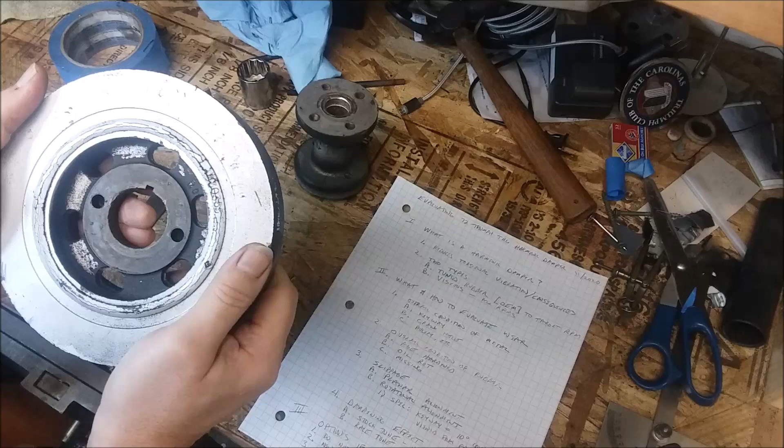Hi, today we're going to evaluate a 1972 Triumph TR6 harmonic damper.

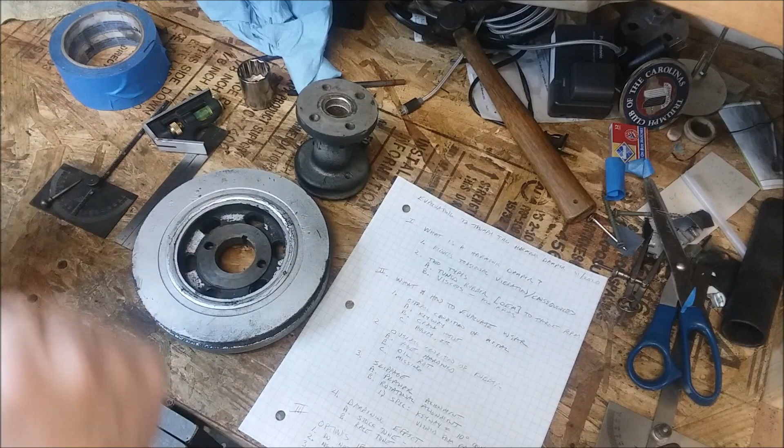Do I reuse it? And if it's not in spec, what are my options? Can I get a new one? Do I rebuild it? Why should I do each? Some of them are really expensive, some are fairly cheap. Which one do I need to get? So on. We'll also look at the tools that I use in doing this.

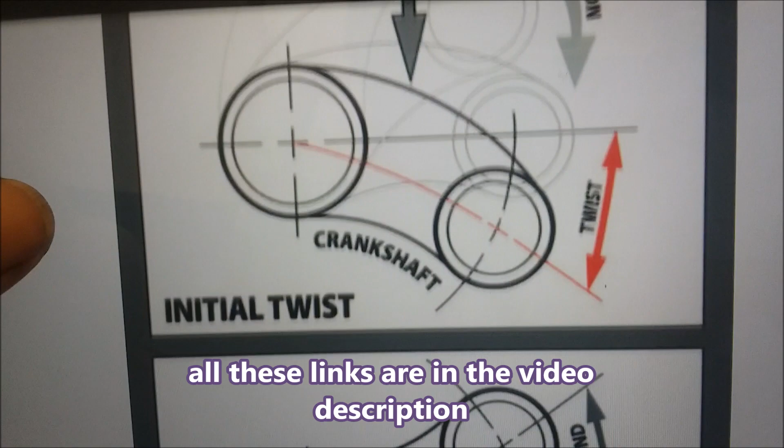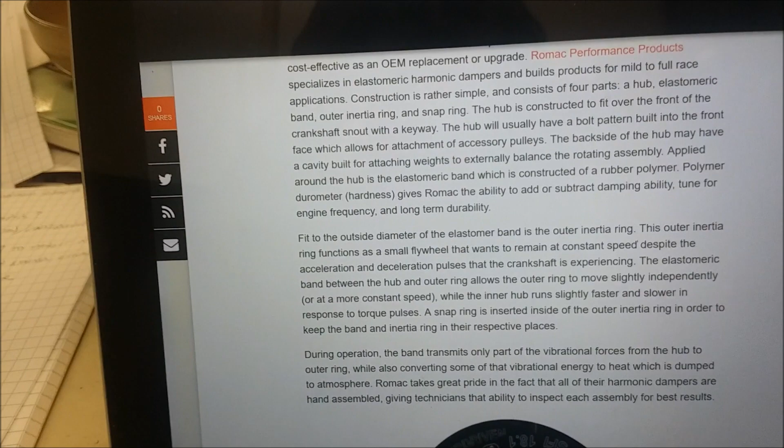This website helped me a lot in understanding what a harmonic dampener does. It's Enginelabs.com, and it talks about how as the pistons fire, the crankshaft actually twists, and explains how the forces of the twist, an initial twist when the piston fires, and then it rebounds. The purpose of the harmonic dampener is to take up some of the energy of that twist and rebound. It talks about how there's two kinds of harmonic dampeners. There's one that has an elastomeric band in it, which is what ours is, and there's another that's fluid. Anyway, it talks about the different parts.

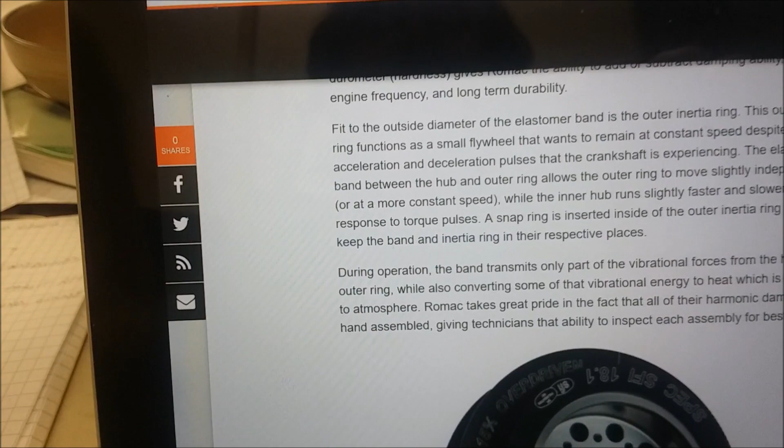There's an outer inertia ring that acts as a small flywheel that wants to remain at a constant speed despite the acceleration and deceleration. There's an elastomeric band, which is the rubber in between them, and the inner hub that runs slightly faster and slower in response to these torque pulses. So the band transmits part of that vibrational energy, the forces from the hub to the outer ring, and converts some of it to heat.

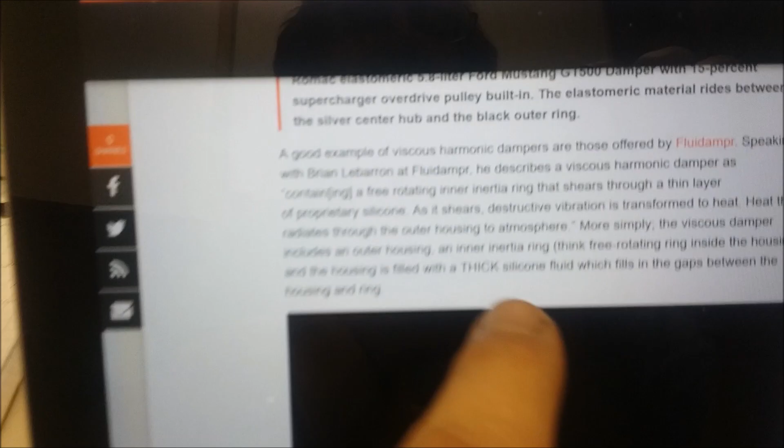Now there's another kind, a viscous harmonic dampener that has a thick silicone fluid inside of it. The elastomeric kind, the kind we have, is tuned to a particular speed. The advantage of the fluid kind is that it works throughout all the RPMs. The elastomeric, maybe they tune it to where we redline, maybe 5,500 RPM, something like that. The fluid one does the whole thing.

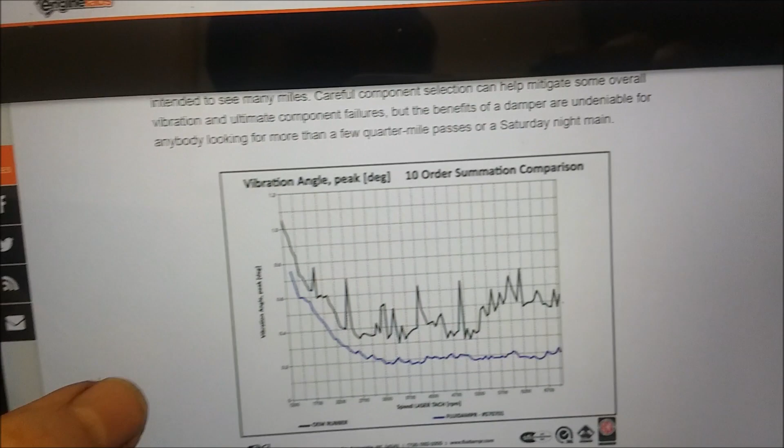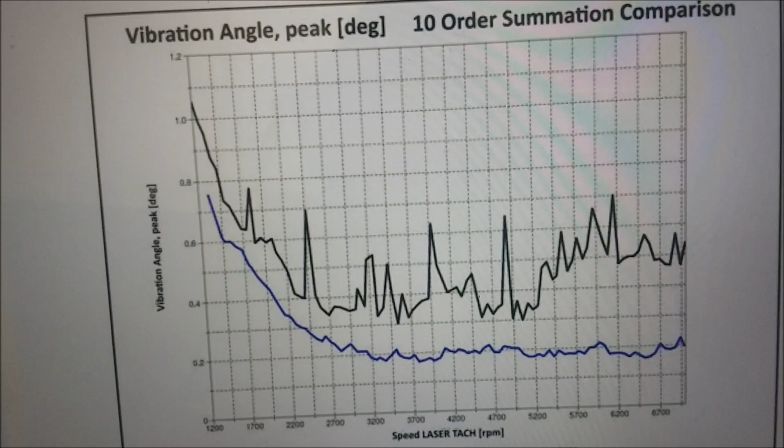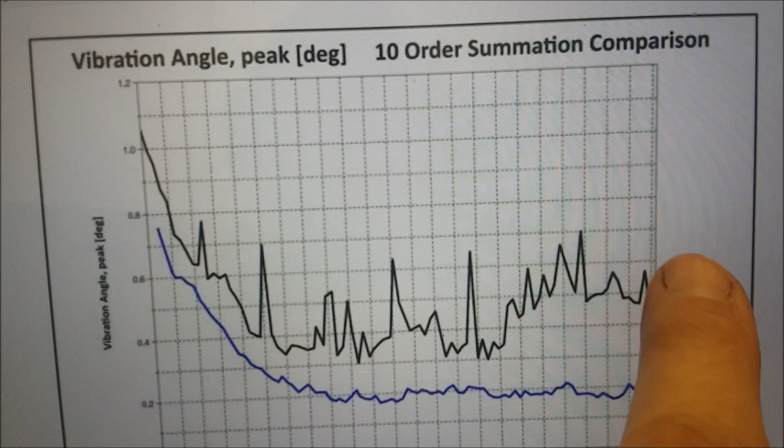So here is a chart. The chart goes from 1,200 RPM to about 7,000 RPM, and it shows our style of dampener has all these spikes in it. The liquid, the viscous one, is nice and damped across the RPM range. And you can see ours, here we go, about 5,500, it starts to really shake. This would explain why, if our chart looks like this, 6,000 RPM is a bad idea in our cars.

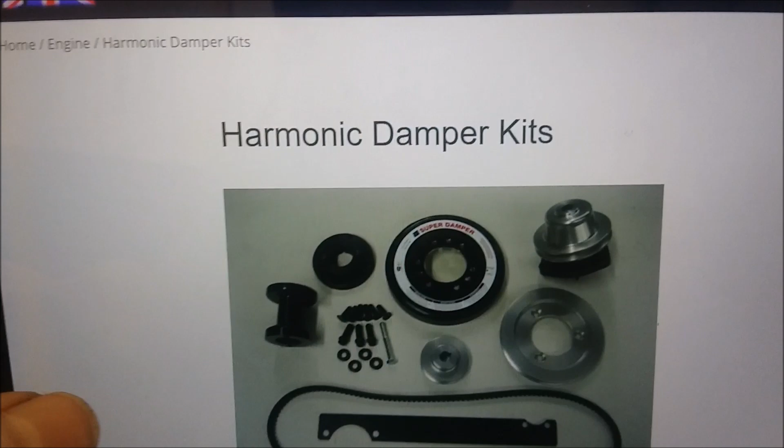It's interesting that if you go over and look at Good Parts, they talk about how you can buy one of these fluid harmonic dampener kits rather than the elastomeric one. And he talks about how it extends the power range by 600 to 800 RPM more.

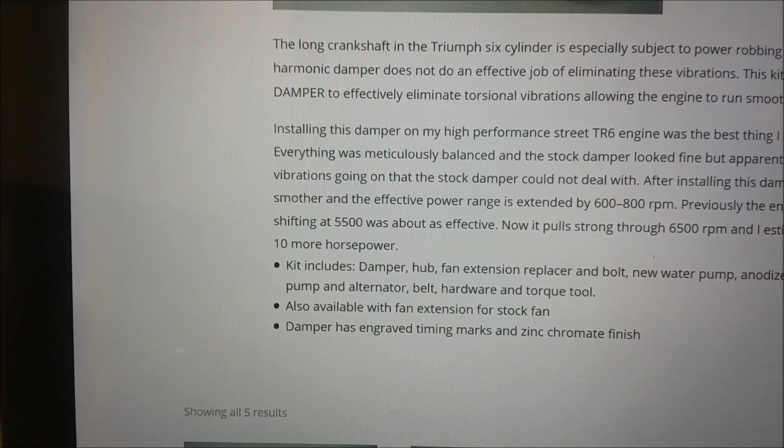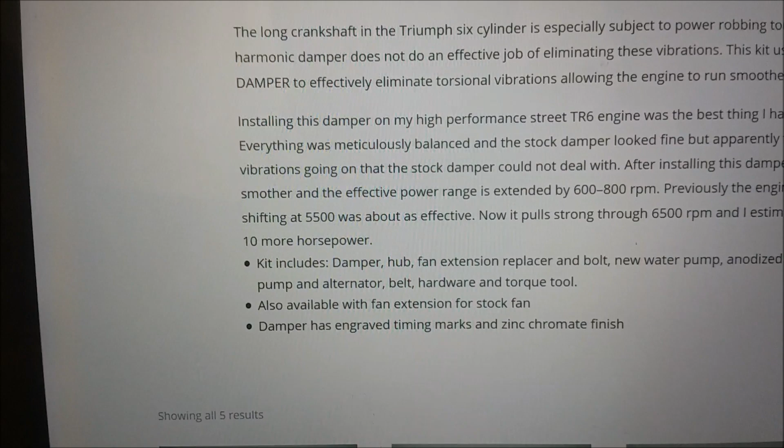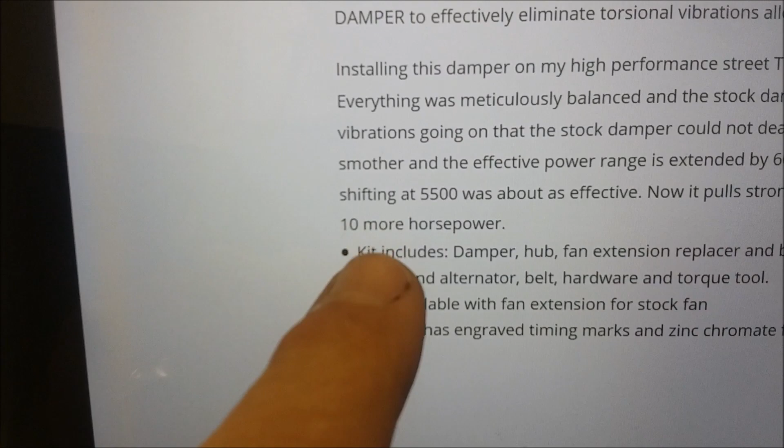Previously, his engine could only run to 6,000 RPM, but shifting at 5,500 RPM was about as effective. Now it pulls strong through 6,500, so it gives him an extra 600 to 800 RPM, and he says he gets at least 10 more horsepower out of the thing. So I thought that was pretty interesting.

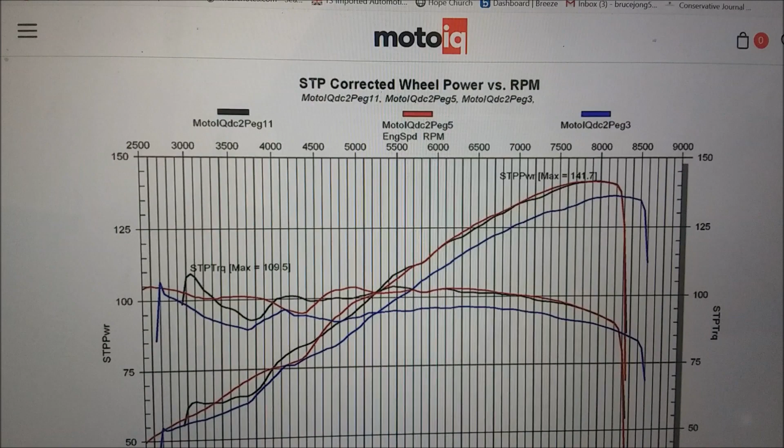So I question anytime anybody tells me I can spend $100 per horsepower to buy their whiz-bang product, whether that's true. I found this motoiq.com site where they actually tested one of these fluid-based viscous harmonic dampers versus one of the other ones, and you can see they were getting about 5 to 10 horsepower more across the entire band.

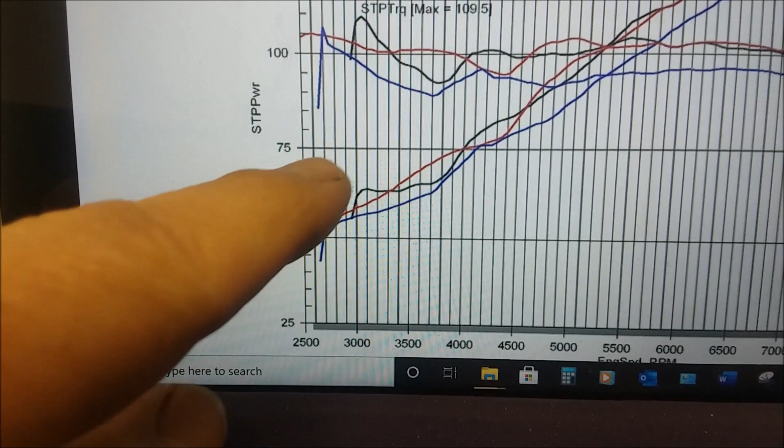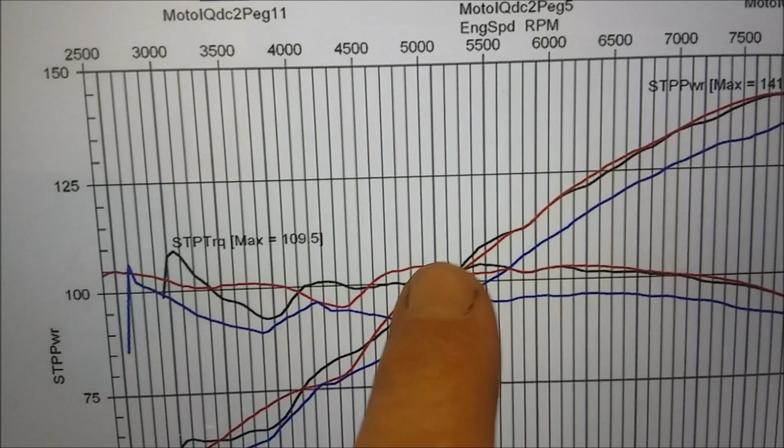The blue, the bottom line, is the base line. This is the base line here, and then these are the viscous ones, and you can see there's about a 5 to 10 horsepower difference.

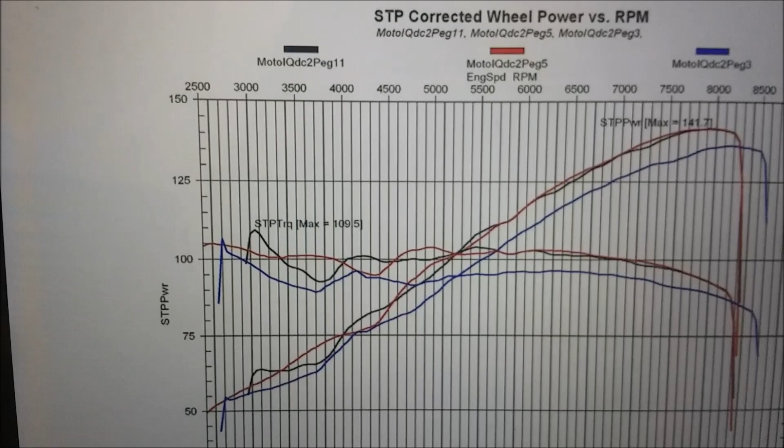Now that's this engine. Who knows with our engines? Good Parts claims they get 5. What would he claim? He said he gets 10 more horsepower, and it pulls strong.

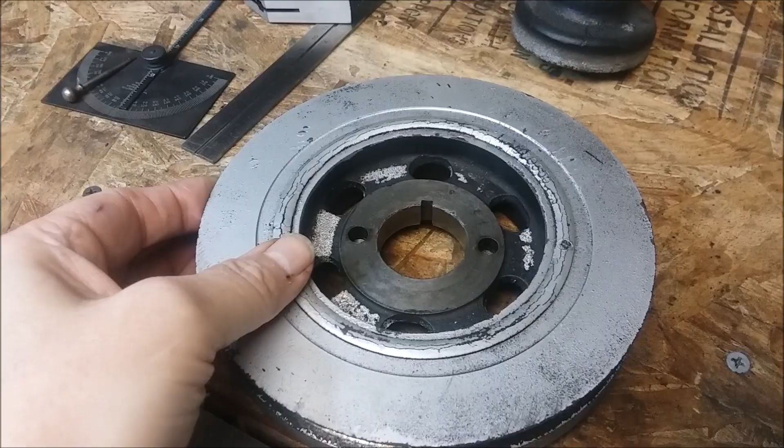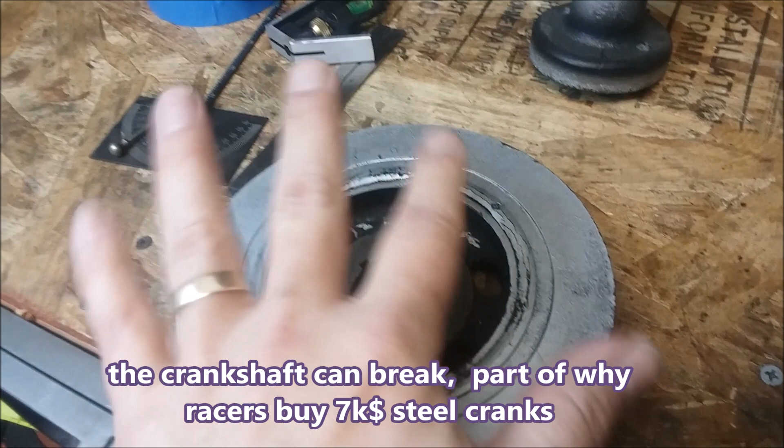So maybe so. So what are the symptoms? How do you tell if this thing has gone bad, if it's no longer dampening? Well, it can cause a vibration in the car, like a drive shaft that's out of balance. It can cause noises, and it can grenade, actually fly apart and grenade the inside of your engine compartment. It also can cause your engine to grenade if it no longer dampens those torsional vibrations, especially at higher RPM.

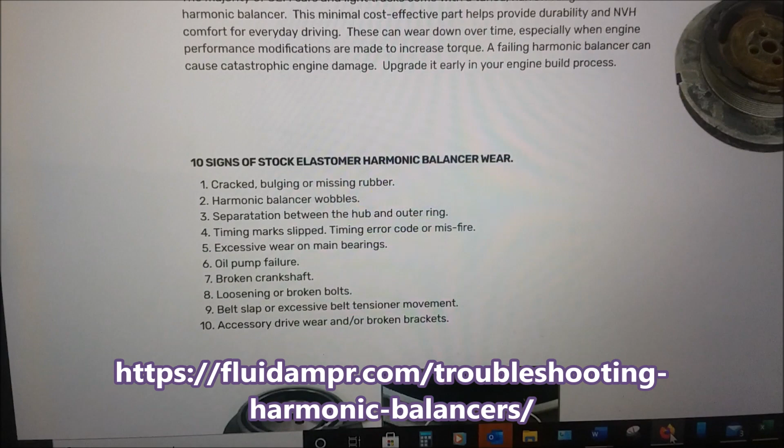I found a great website on troubleshooting harmonic balancers, especially the elastomeric ones: fluidampr.com. It gives a list of 10 things you can look for. I covered several of them. You should cover the rest on your own.

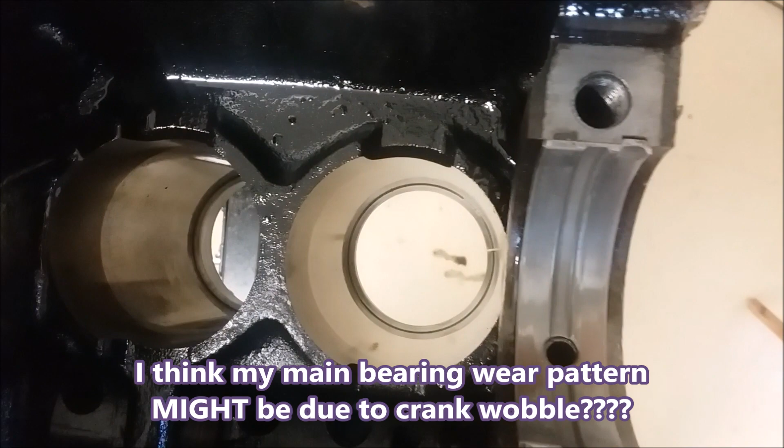A visual inspection of the main bearings shows some wear right here. This one has some staining in the same place, but I'm not sure that's wear. This one seems okay. Number 4 has the most wear, you can see it right on the outside edge here.

So let's get down to evaluating this one. First off, we're going to look at the overall condition of the metal - the keyway, the crank hole, and the pulley, and so on.

Looking at our keyway, this is really important because a lot of these fail at the keyway. We see on this one there is a little damage at the rear edge of this keyway - you can see it's opened up a little bit. I don't know if that's normal or not, it doesn't look like it to me. Maybe somebody tried to force it on, but it looks like most of the keyway is okay.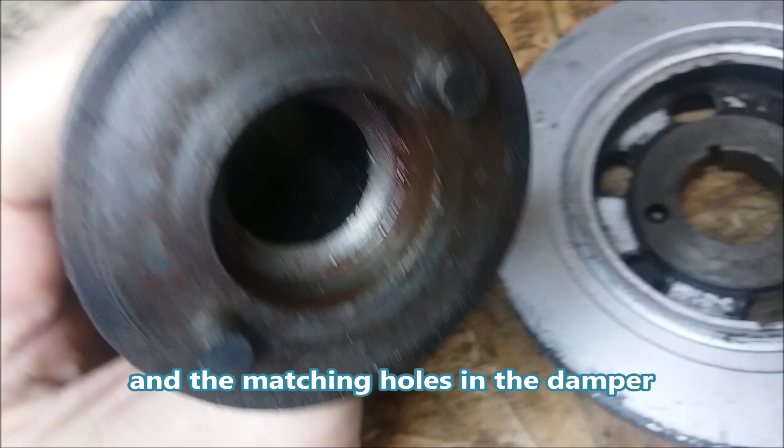The bore hole looks okay. I did a careful examination of it, and I also know that it fits on the crank well. The pulley itself, the metal of the pulley, looks fine - there's no broken, chunked pieces out of it. And lastly, the pins, which are located on the front hub piece on mine, look like they're in good shape. I don't see any evidence of movement or unnatural activity happening here.

So to throw one more piece of controversy in here, there is discussion as to whether or not this piece does damping action. You can buy a fan eliminator kit that will get rid of this piece. Well, that's quite a bit of weight on there, and some people have argued that this weight is necessary to provide additional damping force to the crankshaft beyond just the damper. So if you take this weight off, you're actually allowing your crankshaft to flex more. I don't have an answer to that - that's something you'll have to decide for yourself.

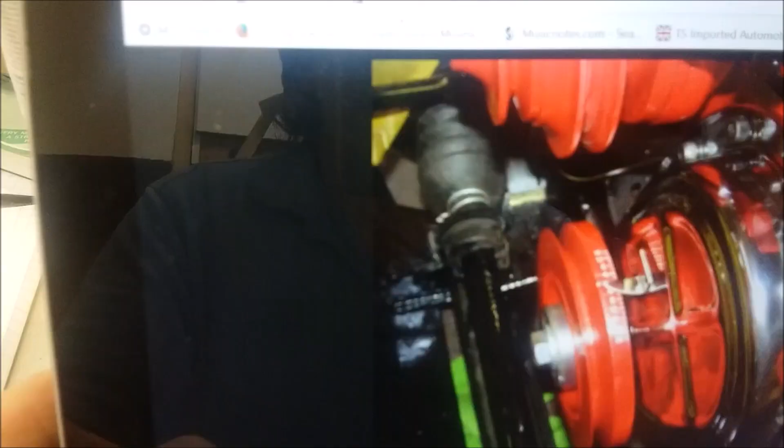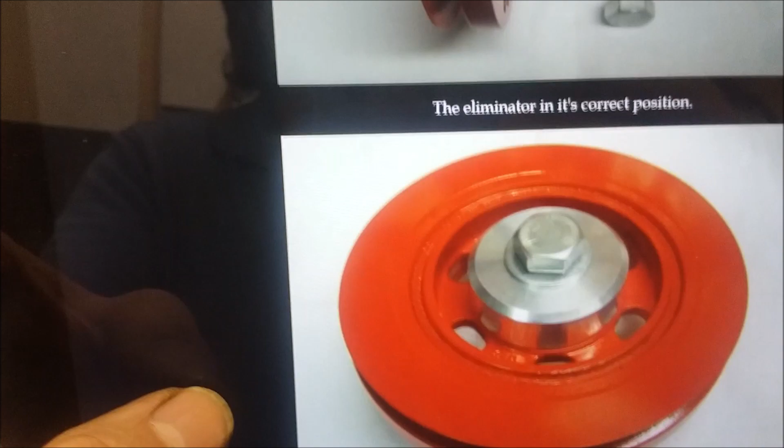So here's an example of that on the 74tr6.com site. He does a section on replacing his damper, and he's put the fan eliminator kit in place on his and seems to be happy with it.

So overall, the metal looks fine. I'm going to give that keyway a pass - I'm going to say good enough.

So now we're going to look at the overall condition of the rubber. Now they painted over this rubber, and the front looks okay - I think that's just cracked paint. So the front of it looks okay. But look at the rear, and it's kind of swollen up and cracked. So there's a problem there.

The first thing I read about is that you look for aged or hardened rubber - is it breaking off, is it chipping off? Well, no, this feels still rubbery, it's not hard. Let's take a look at this side too - this side feels rubbery too. It sort of feels like maybe inner tube tire, or like a tire - it feels like putting my thumbnail into a tire. So as far as that goes, it's okay.

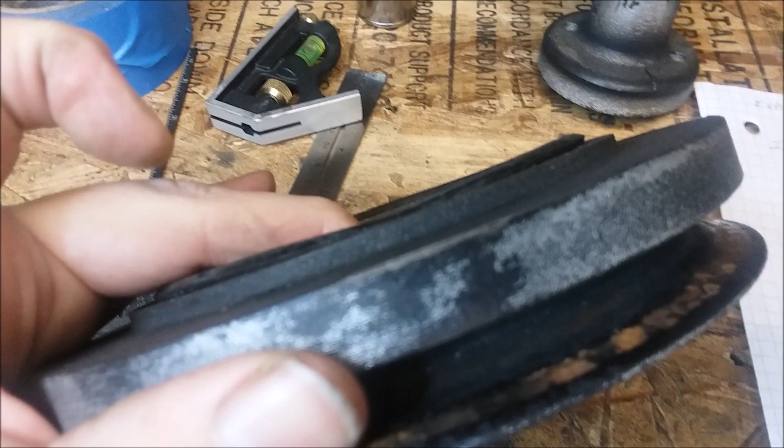So it looks like we're all right for age hardening, at least what we can get to. Another thing they said to look for was oil rot, and oil rot will cause bulging and cracking. Well, that sure looks like bulging to me. That looks like it probably, I would guess, wasn't like that from the factory. And this cracking and bulging, I think that's from oil - this car had a really bad front seal, it leaked oil like crazy. So I think this is oil rot here.

How far in does that go? I don't know - I can tear it off if I really try, but it's really hard to tear off. The other thing it says to look for is if there are big chunks missing. So overall condition of the rubber, I'm going to say questionable - that looks like oil rot there.

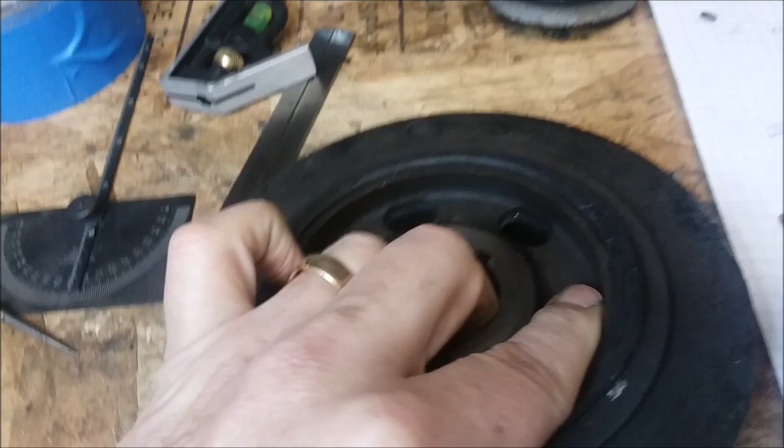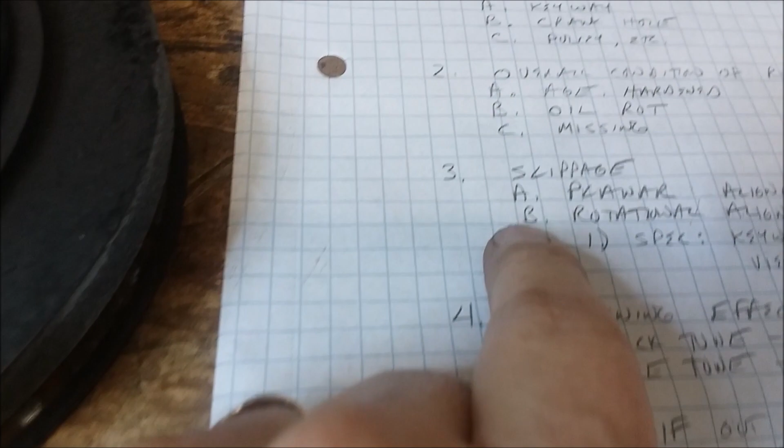I don't know how far down it goes. So the next thing that we can check is the alignment. We're going to look for slippage, specifically planar alignment slippage and rotational alignment slippage.

Now, what do I mean by planar? That's a word I made up. But remember, we have the outer inertia ring and the inner ring. These rings apparently can slip side to side, where the outer ring could be offset to this side or that side. That planar alignment looks pretty darn good to me.

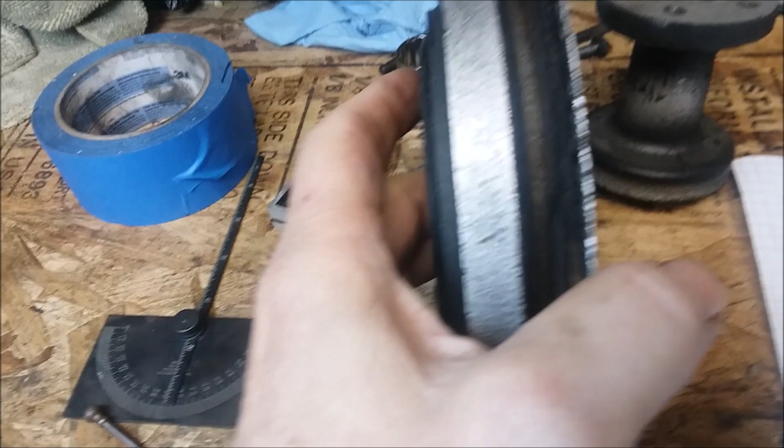Now the question is rotational alignment. You may have heard about this, that there's some question as to whether or not the inner ring turns with respect to the outer ring. If this gets worn or heats up too much, the inertia can actually turn the outer ring with respect to the inner ring.

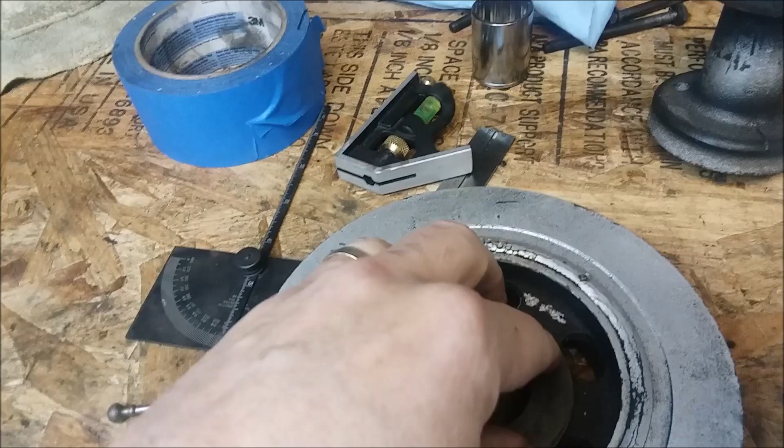Well, what's the problem with that? The problem is this keyway and line is on the inner ring, and your timing marks are on the outer ring. A lot of people have reported that their timing marks are out of alignment, not in the correct position. I saw one for a Spitfire where it was way over here somewhere.

So what is it supposed to be, and how do you measure it? Just taking a quick glance at mine, it looks like the top dead center mark is a little bit clockwise, a little bit this way of where that key is. What's it supposed to be?

I looked in the manual. It's not in the manual. So how do I know if that thing slipped? I've seen a lot of people resort to just timing by vacuum gauges or by ear because they have no confidence in this and they don't know. Well, I think I figured it out. So let's take a look and see what that specification is, the relationship between the keyway and the timing mark, and how to measure it.

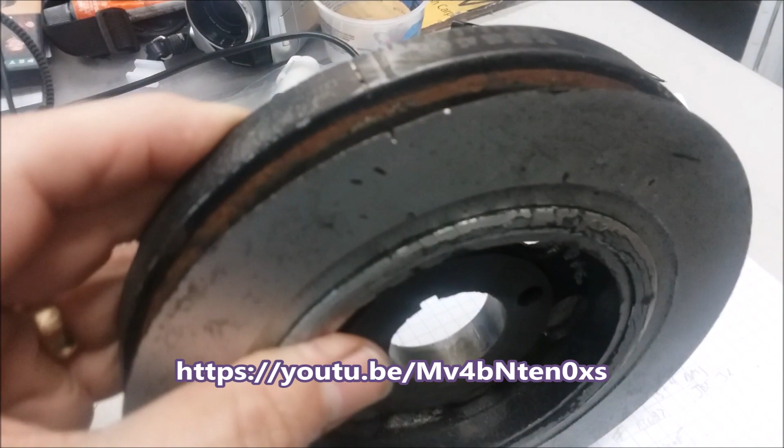So I purchased a new damper that I sent back because the marks here were wrong. I'll put a link to the video there. But at the time I had it, I did compare the crank keyway to the top dead center mark and found that this one was identical with the new one. So I have a pretty good reason to believe that this one has not slipped, and I can use this as a reference.

I did, however, find on the Six-Pack forum somebody who had answered this question under a thread called crank damper key, and they mentioned that they had looked at it and found that it was 10 degrees after top dead center. If your mark shows it to be 10 degrees after top dead center, it was put together by the factory. So we'll take a look at how to measure that.

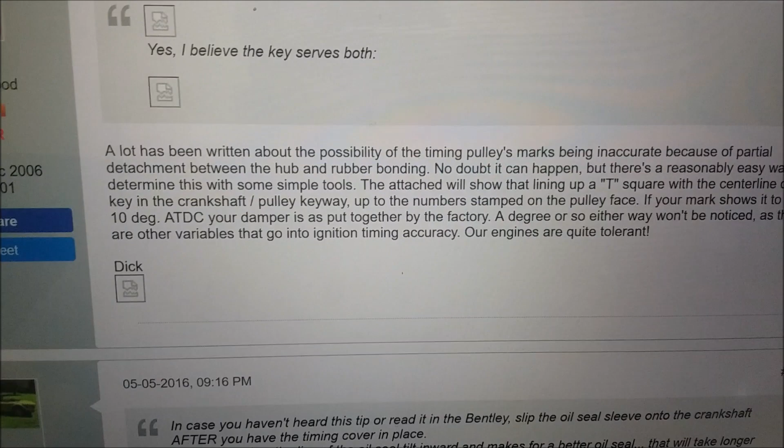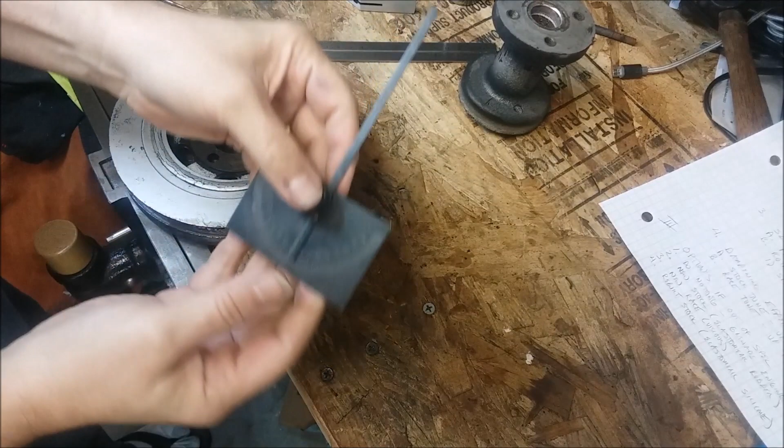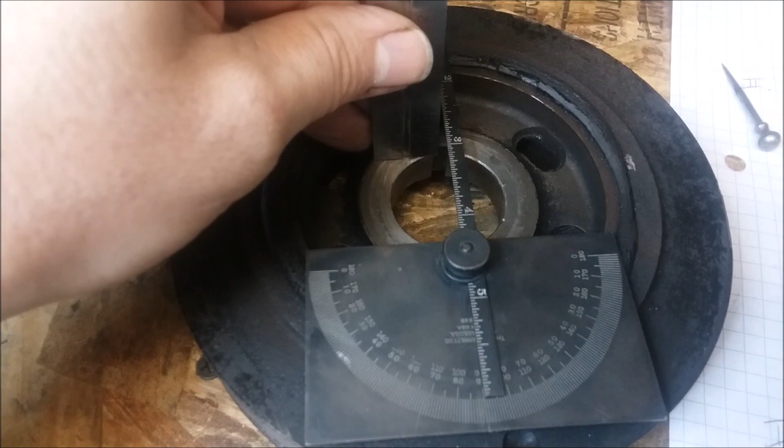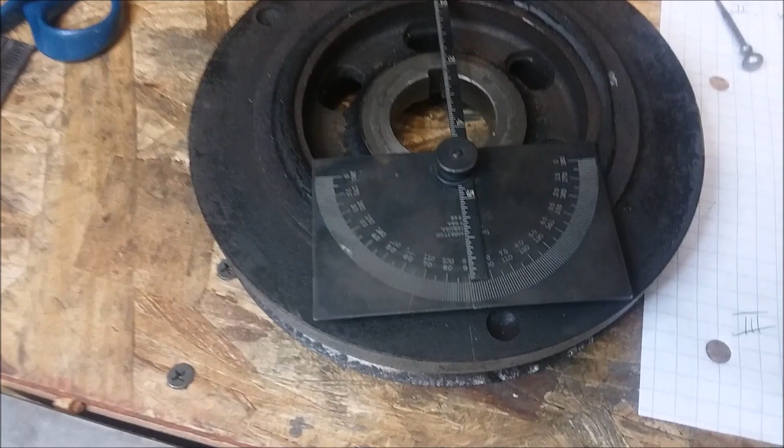I did this two different times, two different ways with two different sets of tools. You might not have one of these, but first off I checked and made sure I had that exactly at 90 degrees, using a square. I turned it over this way because this surface is closer to this surface than the other way around. I put this here like this and got the left side aligned perfectly, halfway over the keyway. Then I made sure that on both sides it was perfectly aligned to the outside of the wheel, and I took the very end of this and marked the edge.

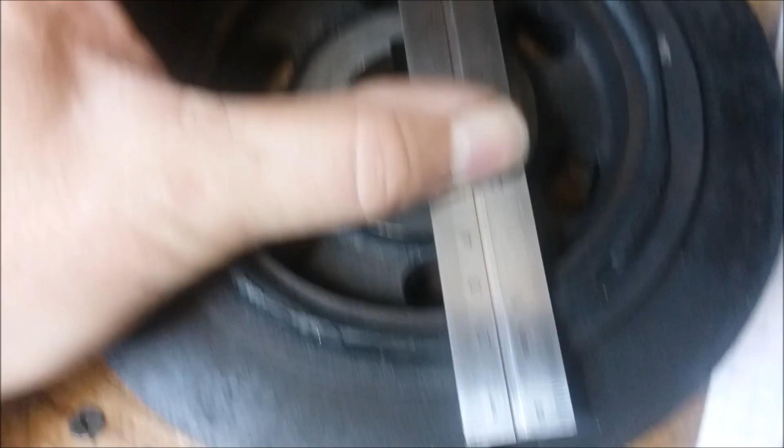I tapped it a little bit, but I marked this edge. I came back, put this rule, aligned it there and here, aligned it on the mark, put it halfway through the keyway, and you'll see we're right at 10 degrees. So that seems to line up well.

Another way to do this is to take a good quality scale that has a center line down the middle and use the principle of a tangent to a circle, making sure you're nice and locked in on both sides. Line that center line up with the keyway. Close one eye so you're not getting parallax problems.

And then come up here and you can see that aligns right at 10 degrees. To be clear about this, the crank hole, the crank keyway, if you come right up here, will align 10 degrees to the left of top dead center. So this keyway points 10 degrees to the left, looked at from the front.

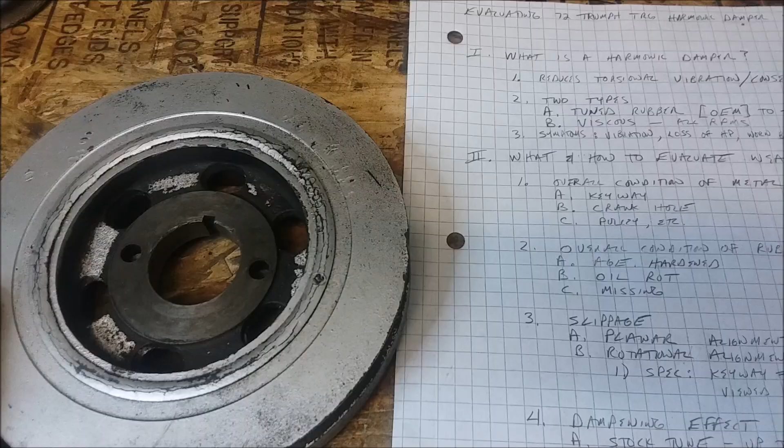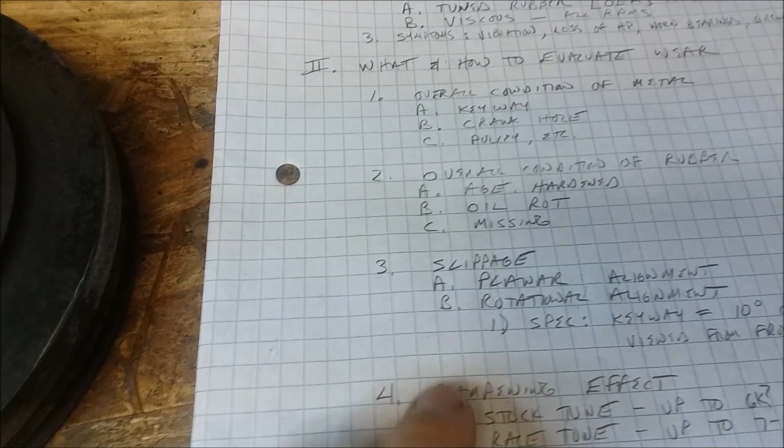So what's the verdict on this particular dampener? Well, I think the overall condition of the metal passed, with that minor defect on the keyway. The rubber, I think we might have a problem with aging and oil problems. As far as slippage, planar alignment and rotation alignment, I think we're okay. Dampening effect, we didn't have any symptoms like vibration or a little squeal or that kind of thing, so I think it's probably okay.

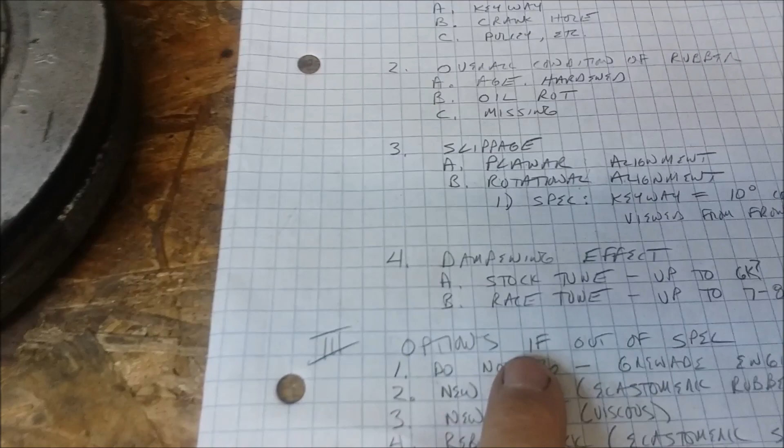So now I have to decide what I'm going to do. Am I going to replace it or not, and what are my options? Well, my options are, first I can do nothing, and I can take the chance of grenading the engine. Now, I did have that one bearing that was worn copper through in the main, so maybe I'm getting some torsional vibration of that crankshaft. I might want to think about it.

So my choice is to do nothing, which I'm not going to do, or to get a new stock replacement in the same way it is, elastomeric rubber, and I can get these from a variety of vendors. I can get a new race one. We saw the one from Good Parts, where we could get the new race one.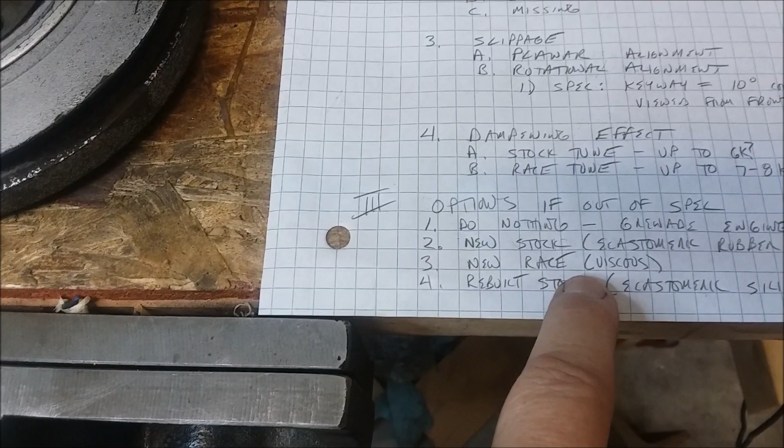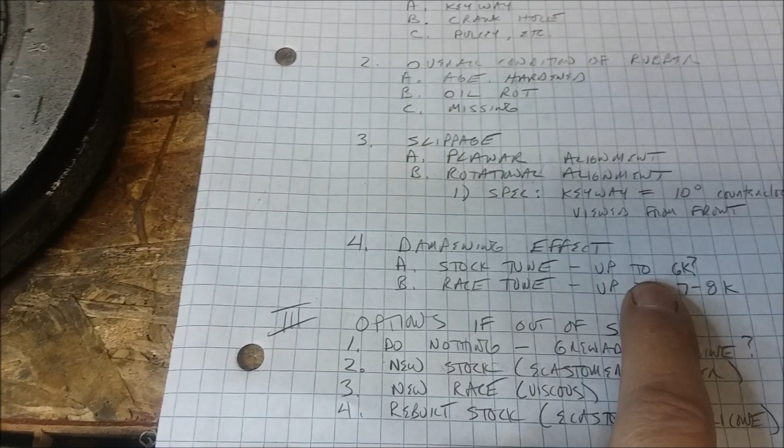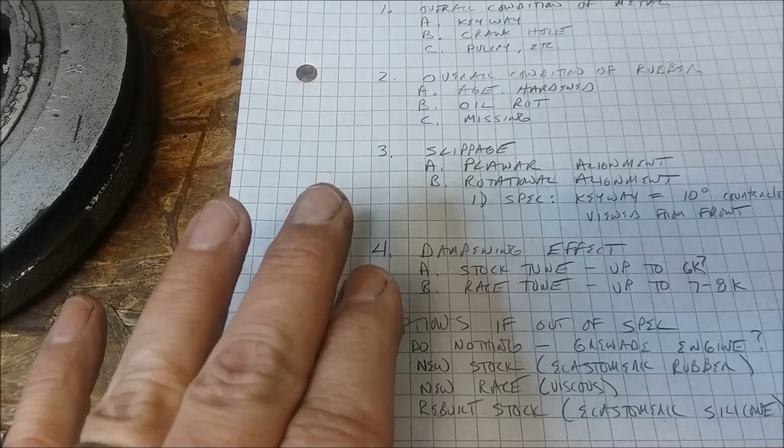Now our choice there is really how fast are we going to spin it. A stock one, if you're going to spin it up to maybe 6,000, the stock one is probably okay. If you're going to be spinning it at higher RPMs all the time, if you balanced your internals, if you've got maybe a steel crankshaft which can take that, and you want to go up to 8,000, you definitely need to get the aftermarket one, the viscous one, like Good Parts' one.

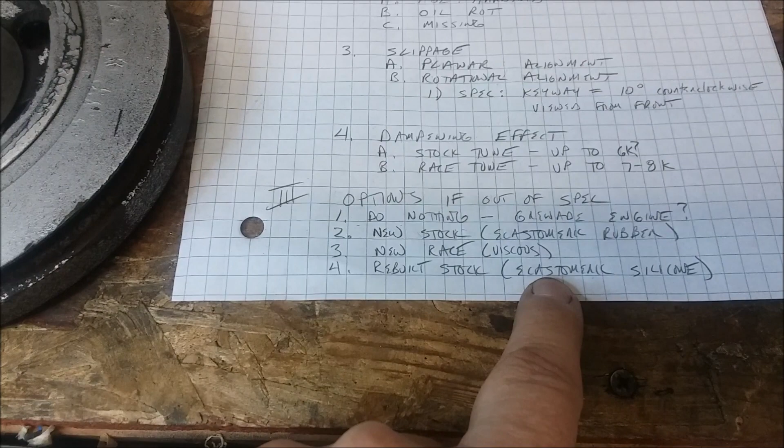So I could get a new race one, pay $1,000, or I could get a rebuild stock one. Now the rebuild stock ones are better than OEM according to their websites. They have a silicone-based rubber that's better at dampening than what's here. At least that's what they say.

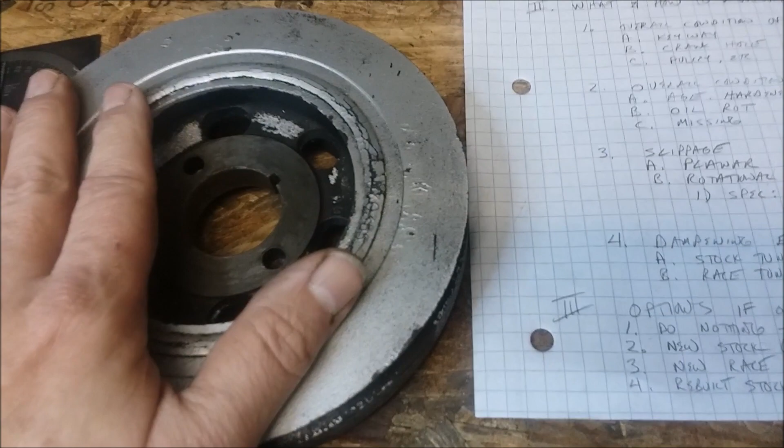Let's take a look at one of the popular ones as far as getting this rebuilt. For rebuild options, you hear about two often: Damper Doctor and Damper Dudes. It's interesting, when you look them up on the map, one's in Anderson and one's in Redding, and they're 10 miles apart in California. So somebody has suggested that perhaps it's the same place.

But you can send it in, and Damper Dudes seems to be a popular one. And if you take a look, they actually even list Triumph, and they have a no-longer-available TR6 aluminum replacement. For the Triumph TR6, it's $112 to have it rebuilt, plus your shipping and so on. So, damperdudes.net or Damper Doctor, take your choice.

Wishbone's Classics sells them for $179, and he claims that they can be off by 2 to 12 degrees on the timing marks. Well, we can check those, right? We know how to check those. So, this is if you want somebody to pre-check it or see what he's got going. You can try Wishbone Classics, or you can go up to the higher end one and get the $1,000 one.

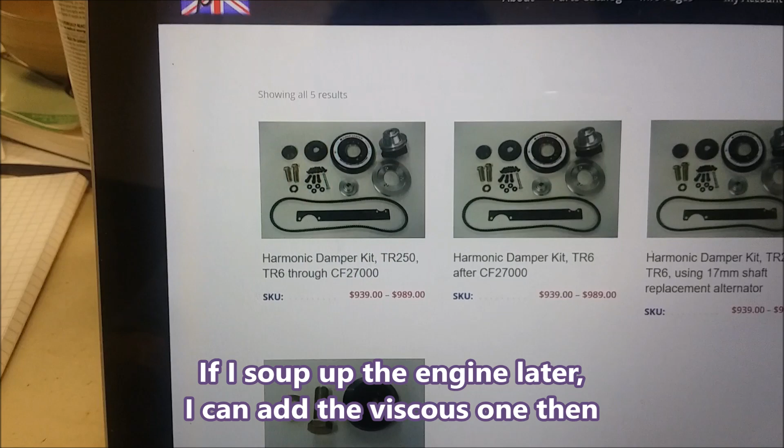From Good Parts, and I'm sure you can find other vendors that have these. I think for mine, I'm going to go ahead and send it to damperdudes.net. A lot of people on the forums have been using them and had good luck with them.

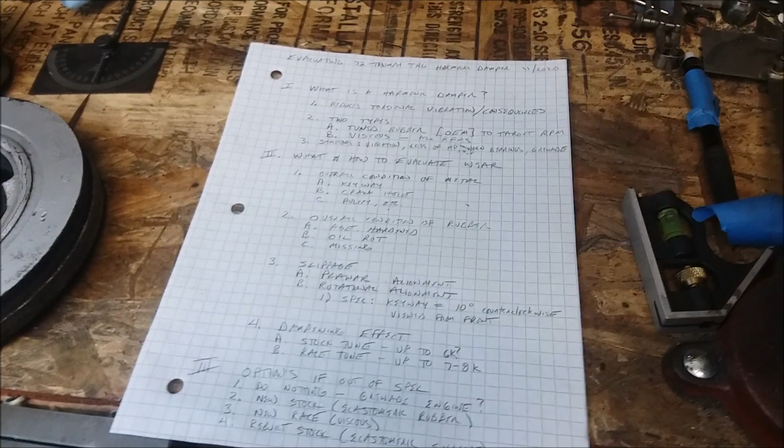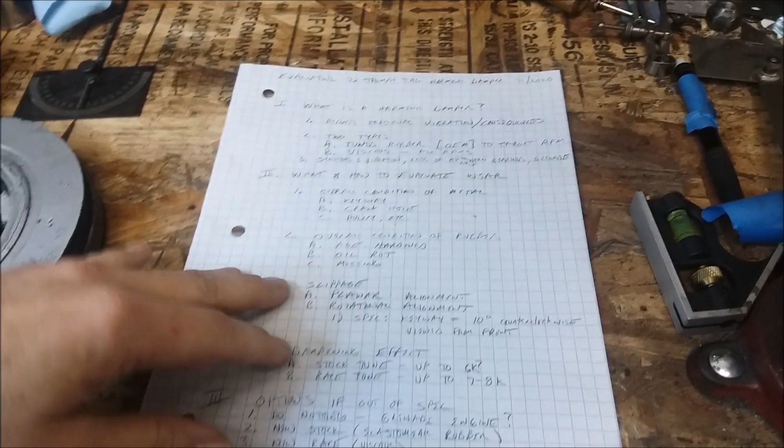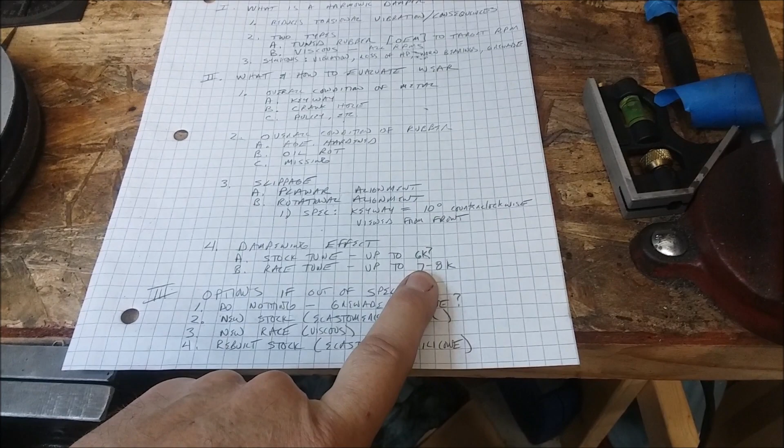Well, I try to cover things that are not in the manual on this channel, and today we did the damper. We found a lot of stuff that wasn't in the manual. We looked at what a harmonic damper is. We looked at how to evaluate the wear. We looked at, especially on the slippage, that the keyway will be aligned 10 degrees counterclockwise viewed from the front. That's spec, so that was good. We learned the damping effect: the stock maybe damps up to 6K, the race or those fluid ones maybe up to 7-8K. We looked at some options about what to do about this thing.